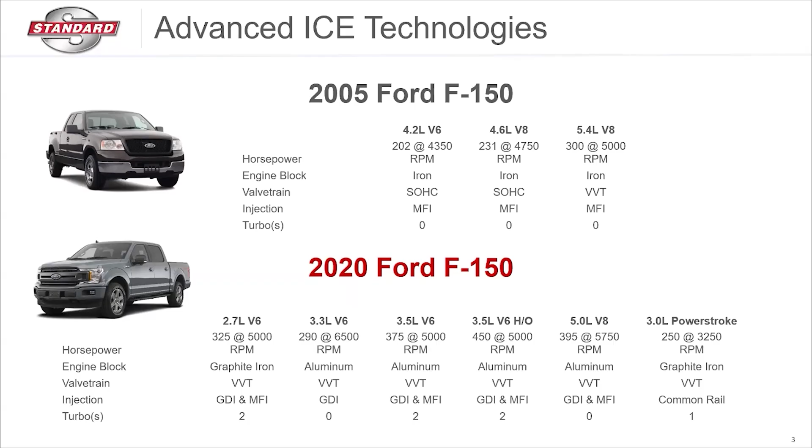And the reason for this is very simple, right? It really kind of goes down to, I know we've all seen it in the shop, the sign that says, we can do good, cheap, and fast, but we can only do two. You can only pick two of those things. Well, it's very similar with these ICE technologies.

What the CAFE standards and the manufacturers are being held to is they're being asked, hey, look, you need to improve fuel economy, but at the same time, you need to reduce emissions. But at the same time, you need to improve the performance of the smaller engines so that the customers don't have a difference in the way that the vehicle drives. So in the case of good, fast, and cheap, where you can only pick two, well, we need fuel economy, reduced emissions, and performance. And we can't just pick two.

We have to do all three. So the manufacturers have to do all three. And in order to make it happen, they are looking into all these different categories here that are being used in some type of unison to get those three things done. And the categories they're focused on heavily to basically cover all of these needs: the economy, the emissions, and the performance.

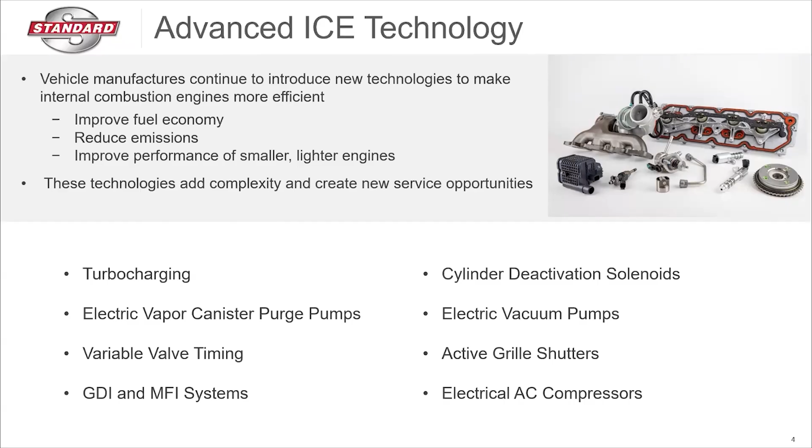They're using turbochargers, vapor canister purge pumps, variable valve timing, GDI and multi-port fuel injection systems, cylinder deactivation solenoids, electric vacuum pumps, active grille shutters, and even electrical AC compressors. There's a lot of different technologies that are now being dropped into vehicles to make sure they can hit these three measurements that they're looking for.

So we'll start with turbocharging. We've seen this and we've talked about it a lot in the last month. If we go back to around 2010 or so, only about 10% of vehicles coming off the assembly line new had a turbo. Some had two, but mostly a turbo. Fast forward to today, right at or a little over 50% of all vehicles coming off the assembly line new today have at least one turbo.

And it's very simple why they're doing this. On these smaller displacement engines, especially the four cylinders, but even in the six, they're going to get better fuel economy and less emissions by utilizing the turbocharger because they're going to get better horsepower and torque, but they're going to combine these turbochargers with other advanced technologies to ensure that we get the power that we want, but we're also lowering emissions and getting a little bit better fuel economy.

And so, we know how a turbo works. The exhaust gases spin up the turbine, which forces the compressor wheel to bring in more air, more dense air, to drop into the intake. But here's the thing with turbochargers, and a lot of these advanced ICE technologies are the exact same way. With turbochargers, the most common reasons these are going to fail are low oil levels, clogged oil lines, or even no oil at all.

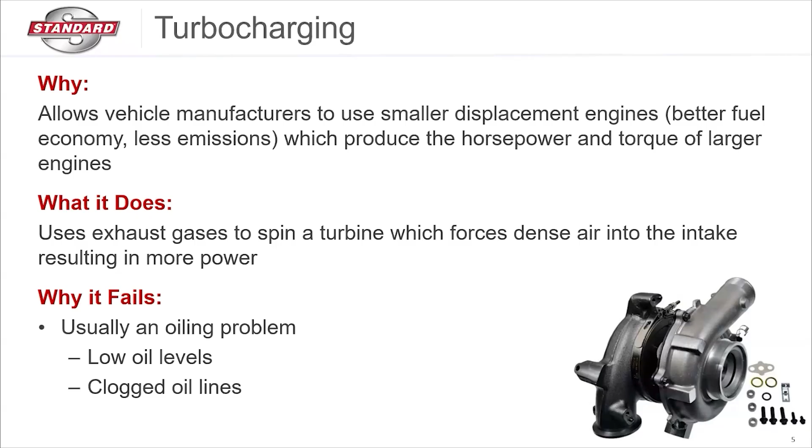We're in a very good, unique position here with all these advanced ICE technologies, us as a manufacturer, and you out there selling the parts to the customers, which is most people don't do their maintenance like they're supposed to. With most of these advanced ICE technologies, maintenance is going to be the killer of it, which is going to make a lot of opportunities for not only diagnosis, but repair. So some things to remind your customers, whether you're selling to a DIY customer across the counter or the top shop in town that's buying a turbocharger.

Try to find the original cause of failure. If this is a technician, they're going to find that we have clogged filters, no oil, or clogged lines. That's part of their job in the diagnostic process. But this holds true for DIY customers as well. We need to ask them when they're buying a turbocharger: do you know why it failed? Because typically they do not fail on their own. Something caused the turbo to fail, whether something was ingested through the air filter because the wrong air filter or no air filter was used, or debris in the oil caused it to cake up and starve the turbo of the lubrication that it needs.

So remember, when we're talking to a customer about a turbo, let's try to find out if they know the root cause. And for sure, when they replace the turbo, let's make sure we recommend an oil change and an air filter to go along with it.

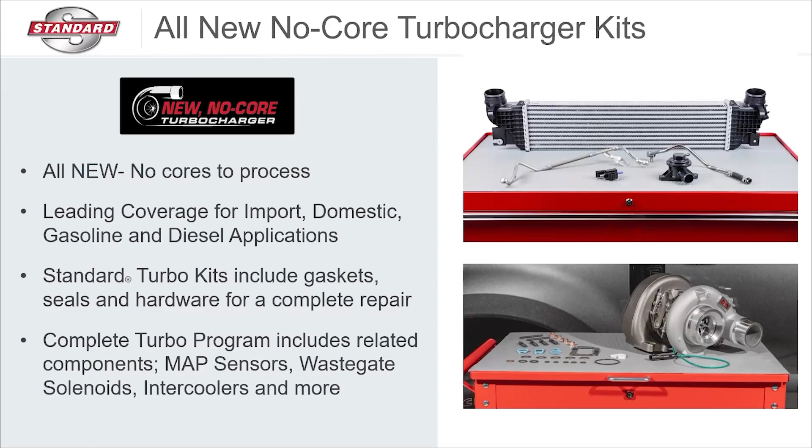Because again, remember, at this point, about 50% of all vehicles coming off the assembly line have a turbocharger, and we already know that the vast majority of drivers do not do their maintenance on time. So it's not going to be long before they're coming into the shop for a turbo repair. And one perfect example of that is the 1.4 liter GM. This was one of the highest failure rate turbos on the market for a very, very long time.

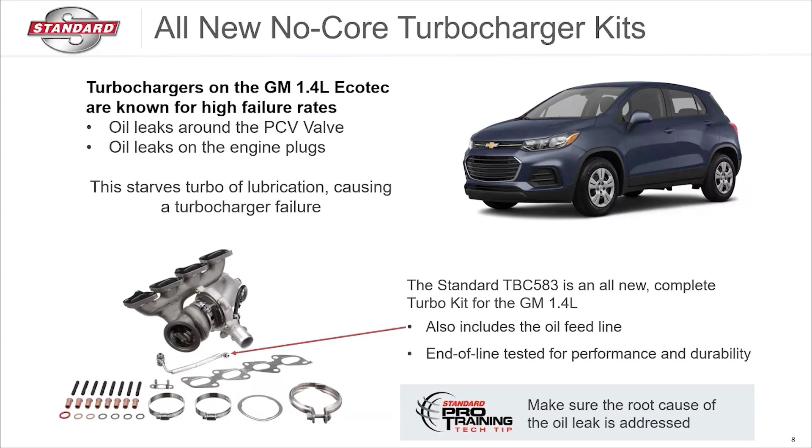But we're also going to include that updated line, that new line that keeps the oil flowing freely to the turbo to lubricate it. So this is one of those advantages through our turbocharger program that your customers have, which is they're going to get everything they need, but in some cases like this one, they're going to get everything they need plus the fix for what caused the failure in the first place.

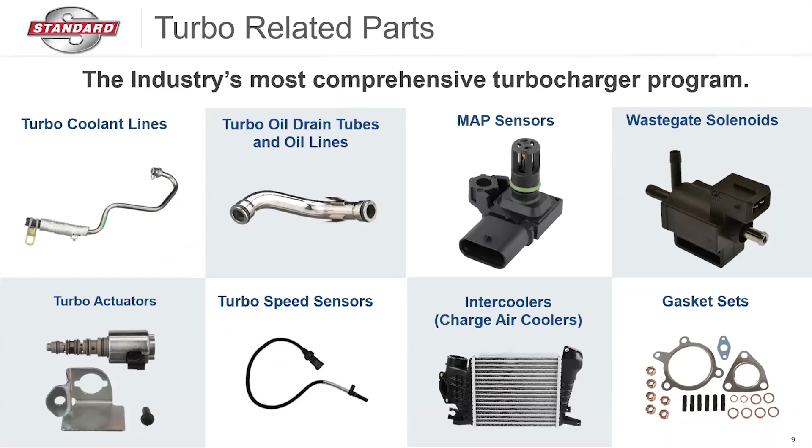And again, all the related components that go along with it. If they need coolant lines, drain tubes, MAP sensors, actuators, speed sensors, or charge air coolers, or just gasket sets, we have them covered when it comes to the turbocharger program. And not only do we have them covered and have everything that they need, but we know they're going to work and we know they're going to perform the way the customer expects.

Right. So I'm here in Irving, Texas at our training facility, but in the back of our training facility, we actually have a vehicle test center. And so what we do out there, not just turbos, all the different categories, but turbos for sure have been a big one lately. Not only do we bench test these and do the hot gas stand testing and all that, we actually have, before these turbos ever go in a box and make their way to your shelf

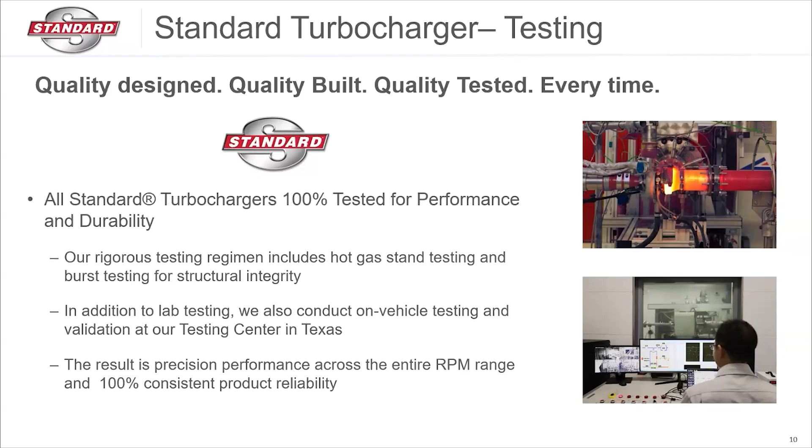to be sold, they actually come to us first and we install these on real vehicles, not brand new vehicles, real vehicles with mileage, with those typical issues that a 50, 60,000 mile vehicle would have. And we test these turbochargers for hundreds, in some cases, thousands of miles before we can put a stamp of validation on it to go in the box and go to your store. So you can have a lot of confidence in these turbocharger kits when they go out to your customers.

All right, so going along with that, moving past turbochargers, I said we also are going to be using electric vapor canister purge pumps. Well, why would we do that? Well, it goes back to turbochargers, because with the turbocharged and those smaller displacement engines, we're not going to be able to get as much vacuum, and we have to purge the fuel vapor canister that's going to be sitting near the gas tank. And I'm sure you sold some of those. Fuel vapor canisters are a pretty big category now as well.

But when those vapors fill up and that canister is full, we have to purge those out, and we need pressure, we need vacuum to get that purge to be completed. And if we have a turbocharged vehicle, oftentimes we don't have enough. And so we'll throw an electric vapor canister purge pump in there, and that's going to basically do it for them, right? We don't have to worry about the vacuum at that point. When the time comes and the PCM commands it, it's going to get rid of those vapors.

But keep in mind, one of the reasons that these fail, same thing with the canister itself, is topping off the fuel. It's going to cause gas to get into the canister and not vapors. The canister is meant to catch vapors, not gasoline. Topping off can get the gasoline into the canister, and now we're going to have to replace that as well. So just something to keep in mind when you're pumping gas yourself.

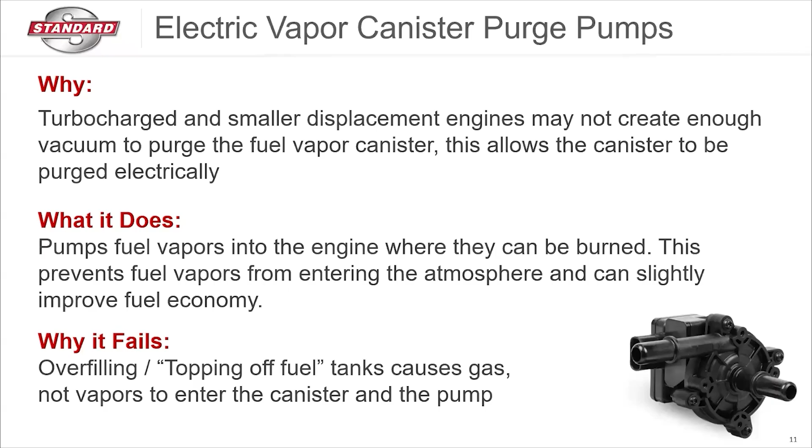Once it clicks, just move on. Trust me, I'm the same way. I want to get it to that 0, 0 at the end. At the same time, though, I don't want to damage a $800 to $1,200 component on the vehicle. So let's just move on from it.

And the nice thing about these electric vapor canister purge pumps for the technician is that they can be manually controlled or bi-directionally controlled with a scan tool. So before the technician has to tear everything off, they can actually verify its functionality before they go and tear everything apart. And they can diagnose it a little bit more easily because it is electric and it is PID related. It goes straight to the scan tool and they can bi-directionally control it.

And just to give you an idea of how many opportunities there are just on these pumps, this one part number you see alone, the CP122, is going to cover 2.8 million GM vehicles in operation on the road right now. So there's 2.8 million opportunities to sell the CP122. So there's another advanced ICE technology that we see being added. And again, that goes part and parcel with the turbochargers. We kind of have to have them because we're doing turbochargers.

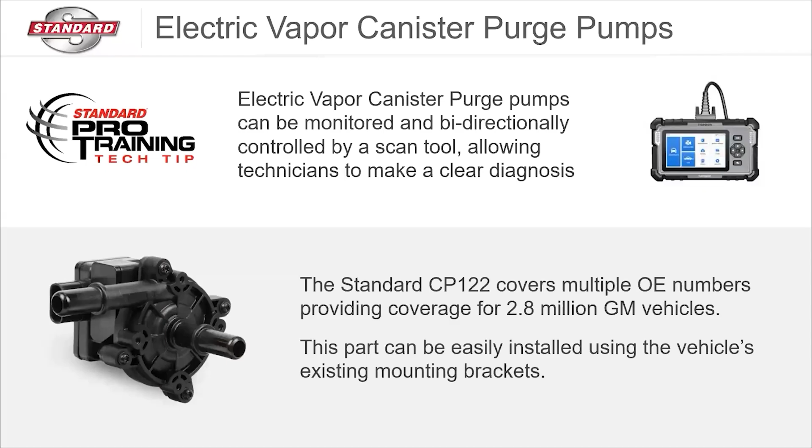But now let's talk about variable valve timing. All right, so variable valve timing is a topic we have spent a lot of time on. If you go to our YouTube channel, we probably have at least 15 to 20 videos around VVT at this point. But remember, I went back to 2005 there, and that's when we saw that VVT system on the 5.4 liter. That was one of the first real big VVT systems people really had to deal with, and it's just evolved ever since.

But the VVT, again, you see it here, adjusts the timing in real time with the driver's input, whether it's braking or accelerating. The PCM is reading all that, and it can change the timing as we're going down the road throughout the RPM range and reduce some of those harmful NOx emissions, right? And again, it's going to primarily use oil. Now, there are variations of VVT, but the most common form right now is oil-based. It's oil-driven. It's a pressurized system. So it's using the same oil in the engine to activate the solenoid itself to activate the phaser.

Again, why does it fail? Same reason turbochargers fail. Oil issues for the most part. Low oil levels, the wrong oil, or extended intervals. And of course, poor OE designs. We've corrected many OE designs when it comes to VVT. And that's why customers love our VVT program.

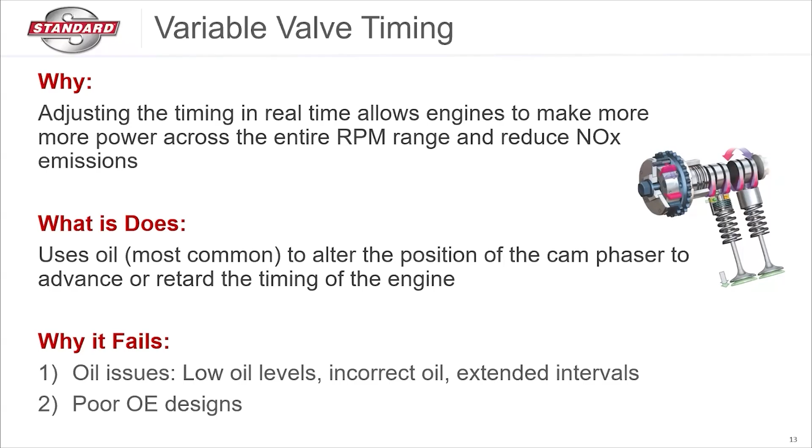But one of the big things here I want to point out is the incorrect oil. Incorrect oil is so important. We've seen that with GM this year. They've actually changed some of the oil parameters on some of their more popular engines because of the VVT system. And so if it says 5W-20, you need to put 5W-20 in there. If it says 0W-16, you need to put 0W-16 in there because these VVT systems are designed around a certain weight oil to be actuated and controlled by the pressure of that oil. And the pressure of the oil is going to be different based on the viscosity. So make sure we're using the correct oil at all times, the right weight and specifications, and at the correct intervals.

I understand there's some manufacturers that say you can go 7, 8, 9, 10,000 miles. Do what you want to do. But with VVT and turbochargers, my suggestion is no more than 5,000 miles before you get the oil change done. It says correct intervals there, but if it says over 5,000 in the book, I'd still go at 5,000.

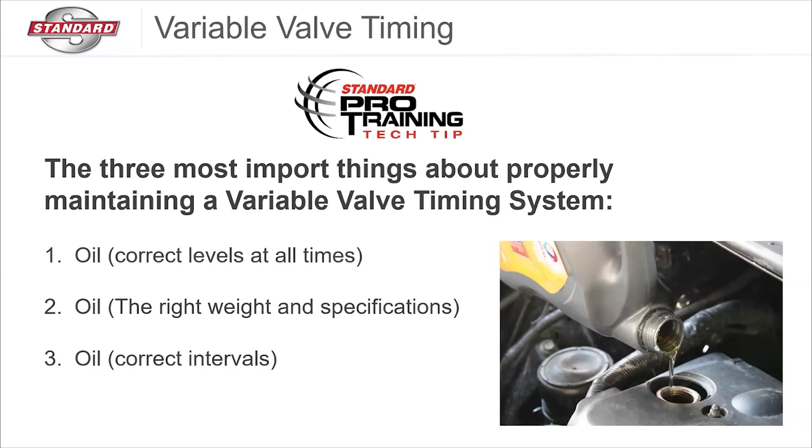And with our variable valve timing program, again, your customers are covered. They already trust our program. We came out multiple times with fixes for common issues, and the technicians saw them, they used them, and they loved them, and it worked out beautifully. And that's why we have evolved this program to be the industry's most complete. And that's not just a saying, that's a fact.

We are the most complete VVT program out there, which means you are the most complete VVT program out there, with over 359 SKUs on the solenoids and kits and over 270 SKUs on the sprockets themselves. But don't forget, when we say program, the most common components are the solenoids and the sprockets, but there's other pieces that go in there, right? To call it a program, you have to have those pieces, and we have them.

The oil control valves, position sensor magnets, spool filters, the VVT chain tensioners, even, going into another category, camshaft position sensors, which go hand in hand with VVT. So again, remember, oil is going to be your biggest killer of VVT, but when it happens, everything that customer could possibly need is there.

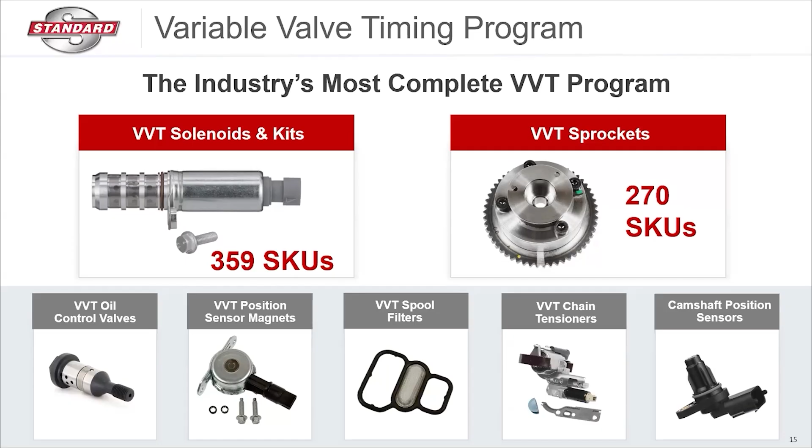And just like all the testing and validation we do on turbochargers, we do the same thing with VVT. The only difference is in some cases, we have made some major changes to fix an OE problem with VVT. The perfect example here is on some of the solenoids. Now, if we go backwards and we go to a value line, you can buy it online real cheap and throw it in, cross your fingers and hope it works. This is what you're going to get when you order that.

It's going to have an internal shaft, which was not the original way it was supposed to be done, which means it's not going to hold up as well. It's going to prematurely wear, and it can break or crack. It's going to basically do all three of those things. The oil screen, right, has got plastic on it. So the screen, remember I said you got to use the right viscosity.

The oil's got to be able to pressurize and go through the solenoid. Well, this is where the oil goes through to command that actuator, right? So those screens have to be free and clear. Any dirty oil clogging those up, it's going to hurt the VVT system. But at the same time, plastic being around those screens is going to deteriorate over time, especially with heat cycles and vibration. And then that's going to cause separating and clogging of the oil as well.

And then at the bottom of the actual solenoid, there's a small ring that's pressed onto the solenoid to hold the actual internal spring in place, the thing that really needs to do its job. And those rings can come loose after a couple thousand heat cycles, and they'll pop out, and now you no longer have a viable VVT solenoid.

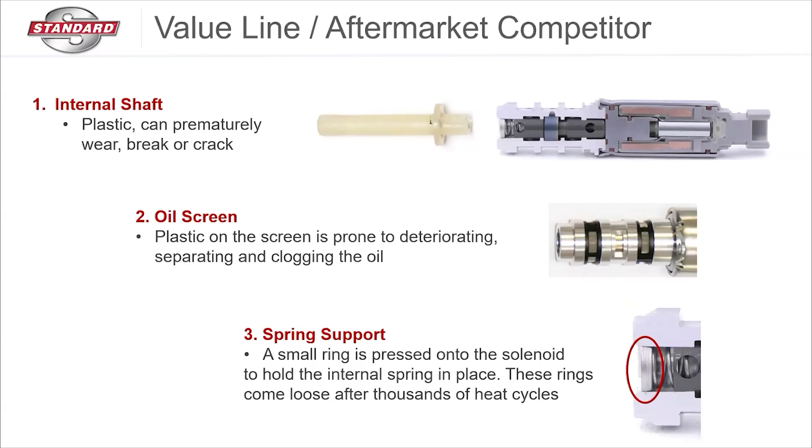Well, if we go to the OE, the original, now that's the value line, and they obviously cut some cost even versus the OE. But with the OE, they did a couple things a little bit better, but not really. They at least used an aluminum shaft here, but that can also deform over time. It's one of the softest metals out there, right? They also still used a plastic to house that oil screen, which is still going to be able to deteriorate, separate, and clog the oil.

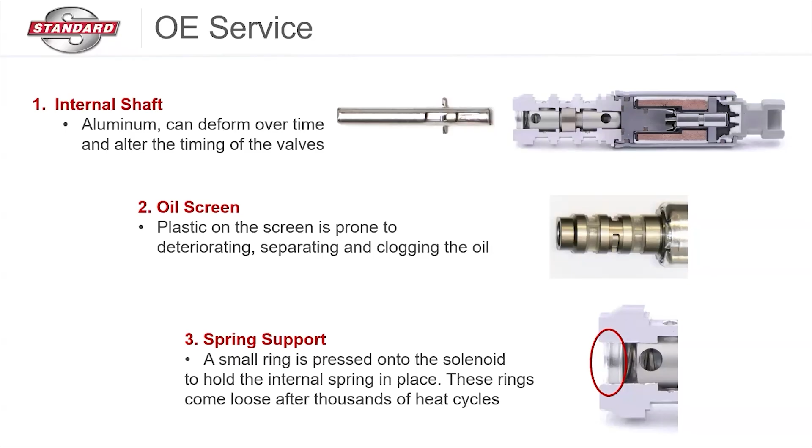And they did the same thing. The spring support is still a small ring pressed onto the solenoid, which again can come out of place. And there you go. Now we don't have the spring actuation to get the phaser to do its job. So what did we do? Well, we fixed it, right? And this is something that most technicians have either tried before or heard about, and they love this.

And so what we did is instead of plastic and aluminum, we did a stronger stainless steel internal shaft. That way you have consistent performance and durability. It's not going to break down like plastic and aluminum. And instead of using plastic, we welded the steel oil screen on so that we know we're going to have better lubrication and durability. It's not going to deteriorate and fall apart and clog up the system.

So we know that that solenoid is going to work for a very long time. And then we also took that cap out of the bottom. We did a one piece, basically an overmold. It encloses the actual body of the solenoid itself. It no longer has that big opening at the end where you have to press something in to keep the spring in. It's overmolded so that the spring can never come loose from there.

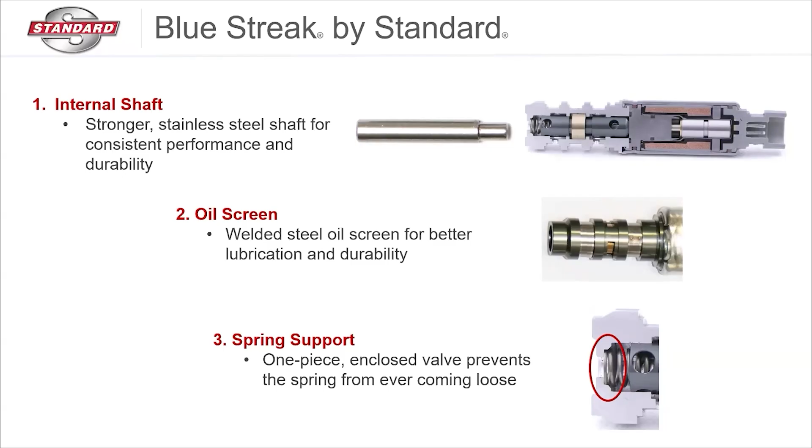So we've avoided all the issues and fixed all the known OE issues. We now have a shaft that's going to work properly. We have an oil screen that's not going to clog, hopefully, as long as they do their oil changes. And we have a spring support that's going to stay in place so that it can do its job.

So again, just like turbochargers, you can have a lot of confidence when you go out and talk about our VVT program, not only because we validate it and test it, but we have everything that the customer might need. Now, the same thing holds true on GDI and multi-port fuel injection systems.

So here's the thing. You're going to find vehicles with MFI, you're going to find vehicles with GDI, and you're now going to find vehicles with both. You can have vehicles, if it's a V8, with up to 16 injectors, 8 of each, right? And they work well in a couple different conditions, right?

They have a couple different drawbacks. GDI, for example, is known for carbon building up on the tip, and that can kill the injector. It messes with the spray pattern. It basically messes with the overall combustion event of that cylinder. But it's great at lower speeds and gives you a little bit more performance and efficiency. Whereas the multi-port injectors are great at startup and higher speeds.

But the nice thing about multi-port fuel injection is it also sprays on top of the GDI fuel injector. So if we're using both in the same system, not only are we getting that performance and efficiency from GDI at those lower speeds, but as we accelerate and as we start up, our multi-port fuel injection is essentially going to be spraying in the same cylinder, and it's going to clean those GDI injectors at the same time.

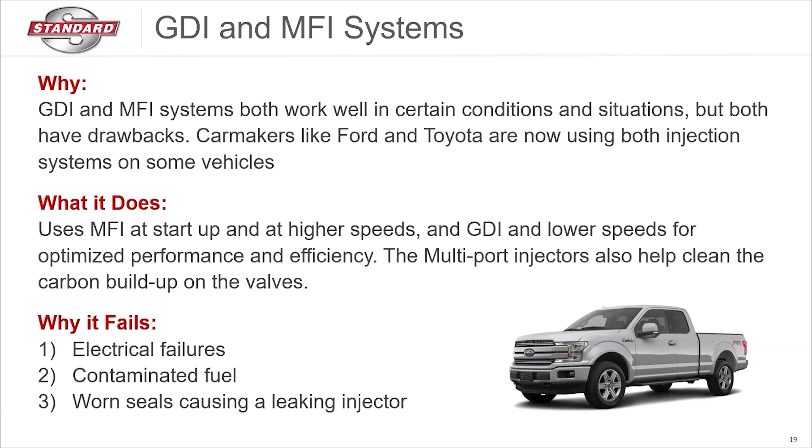So in some cases, we have up to 16 opportunities to sell a fuel injector. And again, our system is a true program that has everything needed. And so it just depends. What I will say, and this is a big point to make, remember on some Toyota GDI injectors, they have different reference numbers and QR codes on them. And that's because some of them have different fuel flow rates, right?

So we need to make sure if a customer is calling on some of these different Toyota systems that we ask which injector they need. The ECat should call out the variations for you and make it a little bit easier. But again, on the GDI program, we have everything the customer may need, whether it's the high pressure fuel pump, the fuel pump kit that may have the lines with it and some other gaskets, the feed lines by themselves, fuel pressure sensors, O-rings, gaskets, the list goes on and on.

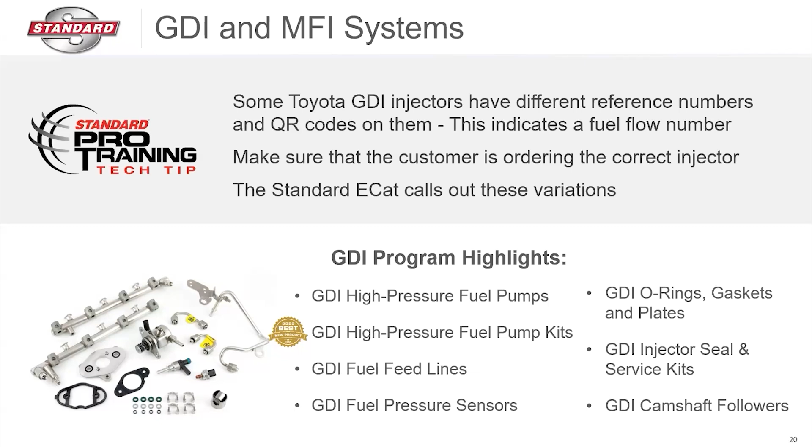When it comes to GDI, we don't just have the injectors for your customer, we have the entire GDI system. So if they have a complete failure, they get some kind of debris that takes out the system, and they need everything you see on the screen there, guess what? We have everything you see on the screen, which means you can now offer that to your customers.

And again, there is no comparison to our GDI and multi-port fuel injection coverage. When it comes to taking care of the customer, we've got them covered with over 762 multi-port fuel injection part numbers and 193 GDI coverage part numbers, right?

And one thing I want to call out here is these are all brand new injectors, whether it's MFI or GDI. There's nothing remanufactured, reused, or repurposed on these injectors. These are brand new, and they are going to perform like brand new with the correct spray pattern and the correct flow rates.

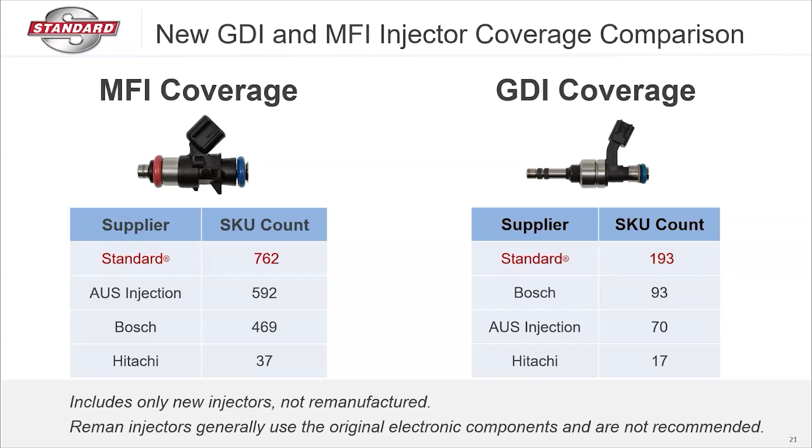And so there's some fuel-related advanced ICE technology, the ideas that are coming out. But what about cylinder deactivation solenoids? This is a newer one, hasn't been around very long, but it is now becoming more popular. And really, all it does is improve the fuel economy on the larger displacement engines like your V8s by deactivating some of the cylinders at cruising speeds.

If you've ever heard of a Jake brake on a big rig, you hear a big rig coming down a hill or coming down a road and you hear that loud, thunderous noise coming from it. Well, what they're doing is they're deactivating cylinders in order to help use the exhaust as a brake on their vehicle. Well, this is similar. Luckily, we don't get that noise. But what it's doing is at lower speeds when you're cruising, basically the PCM just deactivates some of the cylinders, right? So it's going to shut certain things off so that we get better fuel economy.

So essentially, we're going to go from basically running a V8 to a V6 for a certain period of time until we need V8 power again, and it's going to cut those cylinders back on. And so cylinder deactivation solenoids are becoming more and more popular to give you that power. If we're cruising around at 30 miles an hour down the road, all around town all day, probably don't need all 8 cylinders. And so this is where these come into play.

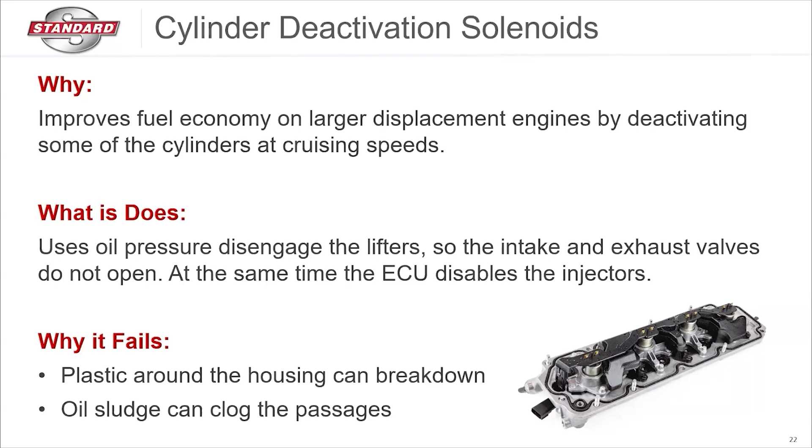And again, why it fails: plastic around the housing can break down for sure. But again, oil sludge can clog the passages. I think we're seeing a theme here. Oil change maintenance is very important when it comes to all these different advanced ICE technologies. And again, there's multiple variations of this, right? So we've got coverage for Chrysler, Jeep, Ram, Chevrolet, and GMC vehicles, different variations, but just know that we have them available for your customers, and they're going to be looking for them because, again, it's a maintenance-related item, meaning when maintenance isn't done, we're going to be replacing these items.

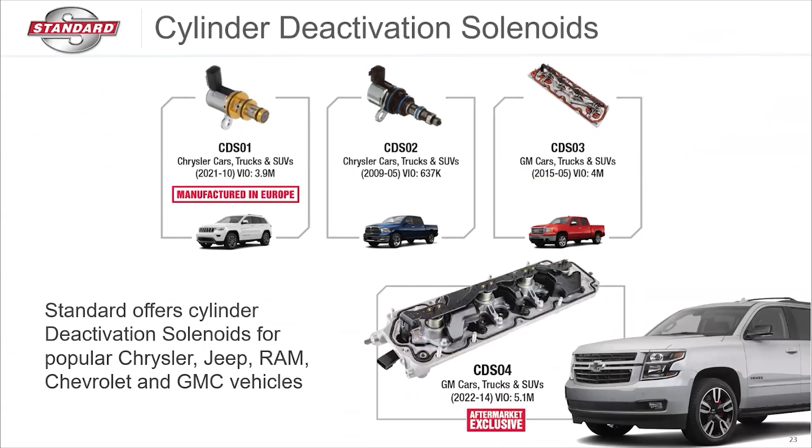Now, moving on from that, we'll go to electric vacuum pumps. Now, this is very similar to the electric purge pump that I showed earlier, right? Again, a lot of these smaller displacement engines do not create enough vacuum for the braking performance, right? And so by using an electric motor, we create vacuum for things like brake boosters, as well as turbo actuators and crankcase ventilation. And the thing is, these vacuum pumps are not just found on internal combustion engines, they're also found on electric vehicles as well.

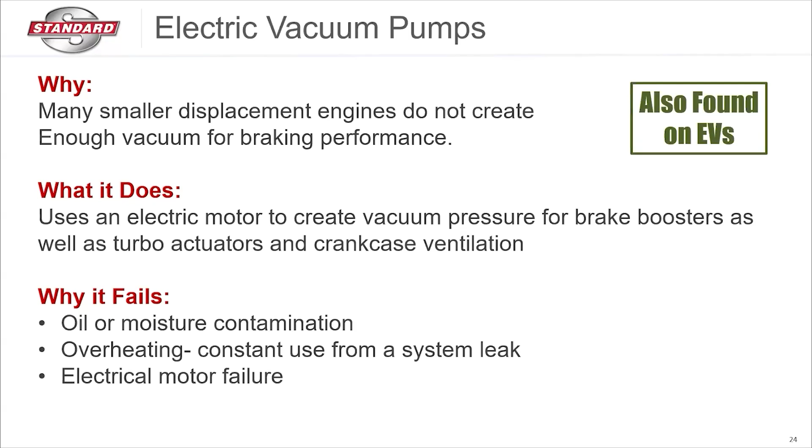But here we go. Common theme again. What causes them to fail? Oil or moisture contamination, overheating, constant use from a system leak, or an electric motor failure. But that first one there is oil or moisture contamination. We don't want oil getting in here. So again, if we have an issue with the oiling system or the maintenance on the vehicle, there's a good chance we're going to see it going somewhere we don't want it to, and this is something that can be affected by that.

And this is not the most high-end category yet. There's only a handful of manufacturers out there that are adopting this for now, but it's going to increase. But just so you know, for those who have adopted it, we've got 12 different part numbers now to service those customers or those manufacturers who have adopted this technology. Again, Chrysler, Jeep, Ram, GM, Volvo, and Ford there, just to name a few, we do have those covered.

And then we'll get into active grille shutters. So yet another advanced ICE technology that's been around for quite a few years now, but it's basically the norm now. Pretty much every vehicle is going to have this. And all it does is improve fuel economy by reducing drag and allowing air to flow over the vehicle. Think NASCAR here. If you've ever watched a race at Talladega or Daytona, when they qualify, they don't care about the engine getting hot because it's only 2 laps. So they just slap tape all over the front grille of that car, and it causes all that air to go across, and we get a little bit better aerodynamics.

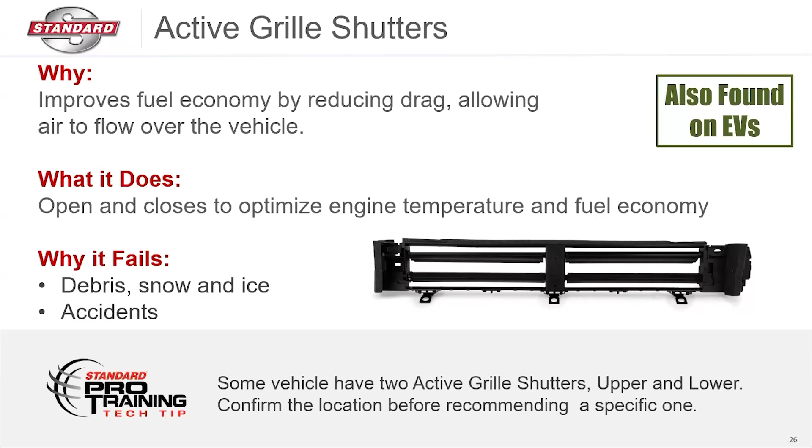But you can't do that forever, or you're going to blow the engine because there's no cooling going across the radiator. And so what the active grille shutter does is it opens and closes to optimize not only the engine temperature, but the fuel economy as well. And of course, why it fails here, very, very common: debris, snow, ice, any type of accident. Any front-end collision, you're basically going to be required to replace the active grille shutter.

And again, it works very simply. When it opens, it allows that air to cross the radiator to cool down the coolant. Same thing with the condenser for the AC. And when it's closed, it closes that gap quite a bit so that more air crosses over the vehicle, improving efficiency.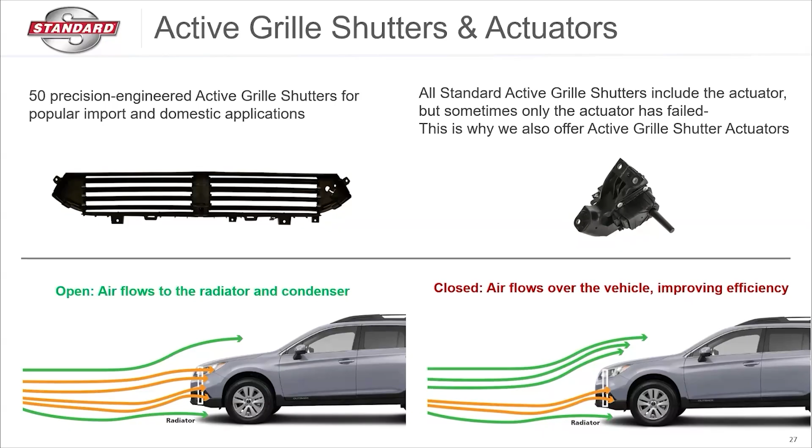So again, remember, we're using VVT to change the timing. We're using turbochargers to get more power. We're using active grille shutters here to get more efficiency with the airflow over the car. And then in some cases, we may even have GDI and multi-port fuel injection on all these same cars, getting better fuel economy and power out of the fueling system in that combustion event. So don't forget active grille shutters. This is another advanced ICE technology that is taking off, and we are there for the customers and ready for them.

And the same thing holds true, and this is my last little bit, is electrical AC compressors. These are really cool, actually. And again, you can find these on ICE engines and EVs. But what it does is it improves the performance and the fuel economy of the vehicle by eliminating the strain on the engine because of a belt. So we're taking the belt out of the equation. We no longer need the engine to turn to activate the AC compressor. The AC compressor can work on its own. It's got an internal electric motor, and it can be commanded all by itself.

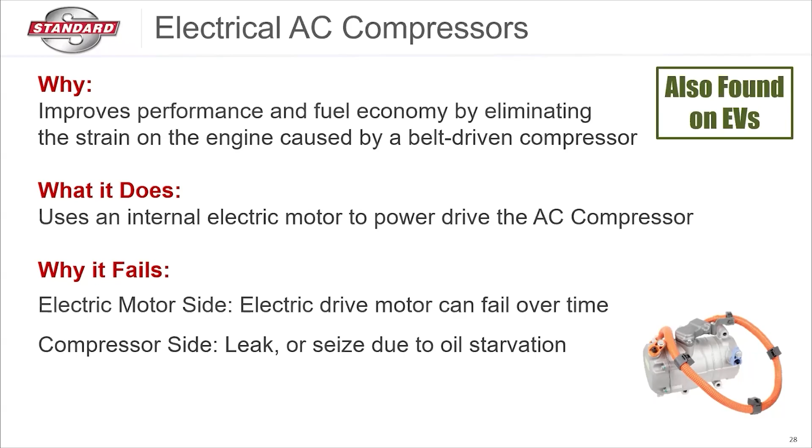Now, on the electric motor side, you can have the electric drive motor fail over time, and you could still have leaks or seizing due to oil starvation on the electric AC compressor. But the reality is we've reduced a variable, which is the belt and the performance of the engine having an impact on the AC compressor itself, right? And the cool thing is these are on EVs and ICE engines.

And what's even cooler about it, if you ever walked by a Tesla in a parking lot and it's 95 degrees outside and it's been sitting there for 2 hours, you might hear it for a second and go, is this car running? Well, the car's not running, but the compressor is. What's really cool about these and a lot of vehicles that utilize them, the vehicle can determine that the hybrid battery or the electric battery or the coolant has gotten too hot to service those batteries. It will kick these AC compressors on to cool down the batteries while you're at work, just sitting in your office and knowing that the car's out there burning up in the sun. So with the electrical AC compressors, the vehicle can do even more to protect itself when you're not even there.

So this is again one of those categories where we're going to see a lot of adoption from manufacturers. And one of the things that we got to make a point out of here is when you do sell one of these, or you get a call about one of these, make sure you look up the correct oil that goes to it. It has to be a non-conductive AC oil. You do have it, I promise you. And well, if it's one of ours, it's going to tell you exactly what needs to go in there. But you need to make sure you're selling the correct oil for this, so that way we don't have a high voltage short to ground that's going to end up disabling the vehicle.

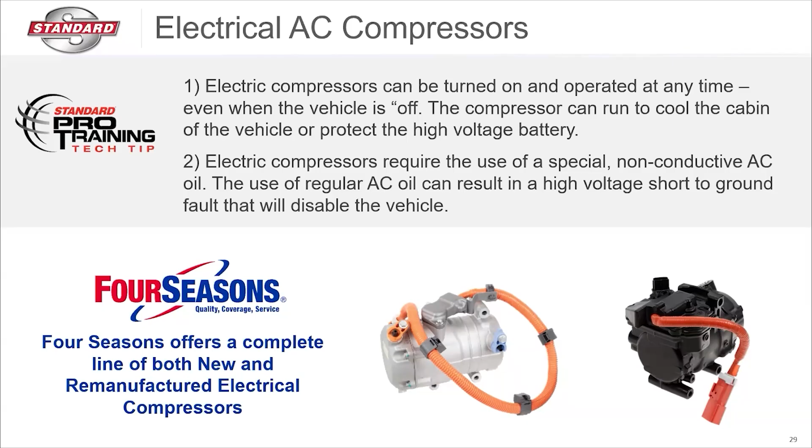So all in all, that's a lot of different categories, right? But again, most vehicles now are adopting the majority of them, but in some cases all of them, to get this fuel economy, this performance, and this reduced emissions. So keep all of these in mind, and remember, throughout all of the different categories we just talked about, you have your customers covered, you have quality, and we're ready to take care of those technicians and those DIY customers with any of these advanced ICE technologies.

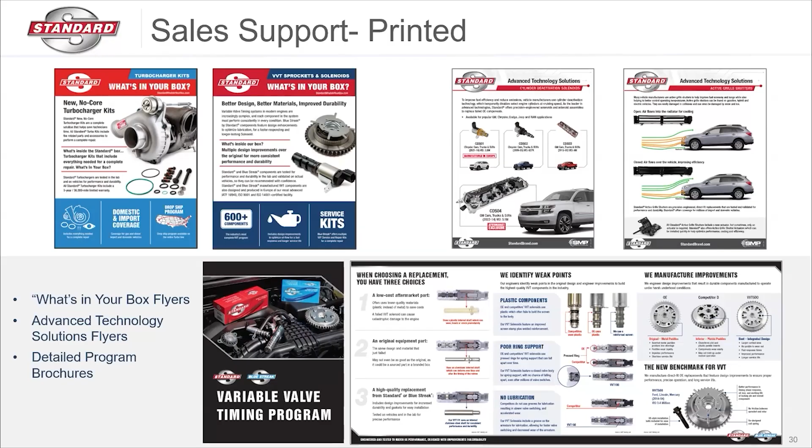And with that, Aaron, I want to pass it off to you so you can show these folks some of the things you've done to get them some support out in the field when they're talking about all these different categories. Go ahead, Aaron. Awesome. Yeah, thank you very much, Corey.

And that was great. Corey really went over 8 different newer technologies that have been adopted to help make vehicles more efficient, certainly make them more consumer friendly as it's increasing fuel mileage. And these are all categories that are going to continue to grow in the next 10 years for sure.

What we've done from the marketing side is create several different pieces, different printed materials that you can use after this call to take some of these messages to the street. On some of the more established traditional categories, we have product flyers that we package as What's In Your Box, our major marketing initiative. So we have these around popular categories that you're probably already selling.

Some of the newer technologies, we've dropped into a newer template called Advanced Technology Solutions. So we have these flyers for cylinder deactivation solenoids, as well as active grille shutters. And then some of even the larger, more popular categories will do full line program brochures. So we have these available in categories like VVT. So we certainly want you to feel prepared and able to take this message out to your service provider customers today and every day.

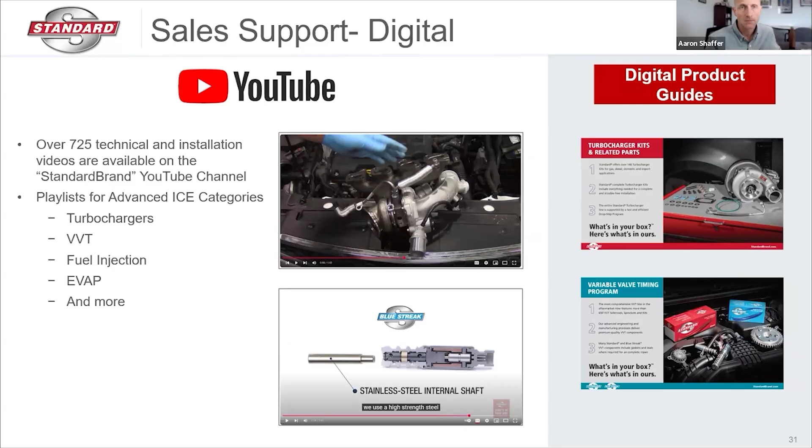So, as you can see, we try to have you covered as best we can to support these growing categories. Really, what you're able to go to the street with, when you're talking about our products, when you're selling and representing the Standard box, it's a commitment to developing components for the next generation of vehicles. And I think we've learned in recent years that the next generation isn't necessarily going to be electric. But what the next generation will probably have is an ICE engine with an awful lot of electric add-ons to make that ICE engine more and more efficient.

So even though most vehicles today are still having internal combustion engines, you'll see that more and more of them will have electric canister purge pumps, electric vacuum pumps, electrical AC compressors. So vehicles are getting more and more electric, whether we realize it or not. With us, you also get in-house design and manufacturing. That's something that has become unique with our company, but we do have 21 of our own manufacturing facilities in the U.S., Mexico, and around the world.

Our products are also extensively tested in the lab, end-of-line tested before they're put in the box. New applications, as Corey talked about with turbochargers, are extensively tested on vehicles at our testing center in Texas. And then in addition to the actual parts, we round it out for you with complete programs. And that's what makes things like the turbocharger offering, the VVT offering, the fuel injection program so unique, as we're able to go to the street with the most complete programs in the industry, as well as detailed sales support and training programs for you and your technicians to make sure everyone is best prepared to be able to diagnose issues on these vehicles and correctly repair them.